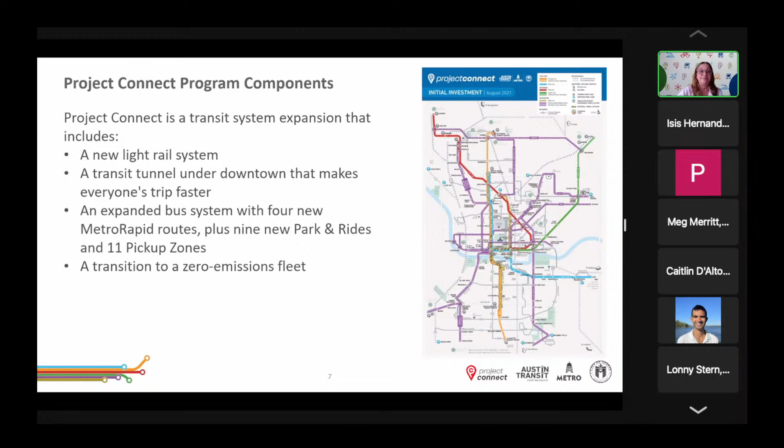Project Connect is a transit system expansion that includes a new light rail system, a transit tunnel under downtown that makes everyone's trip faster, an expanded bus system with 4 new Metro Rapid routes, plus 9 new park and rides and 11 pickup neighborhood circulator zones, and a transition to a zero emissions fleet to protect our environment. A key way to realize the efficiency of transit is through the value proposition of the Orange Line - dedicated transit ways that can move the most people in the least amount of space.

This is a rendering of a non-specific street where we could accommodate all modes of mobility. Of course, on Guadalupe we are very constrained, and therefore we are here tonight to discuss the various design solutions given those constraints.

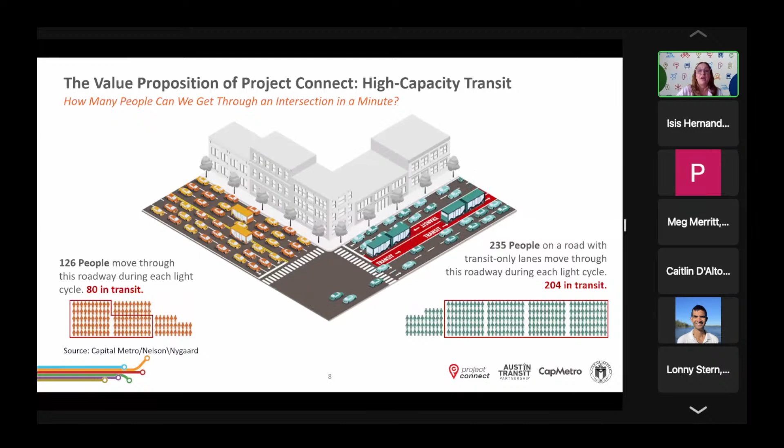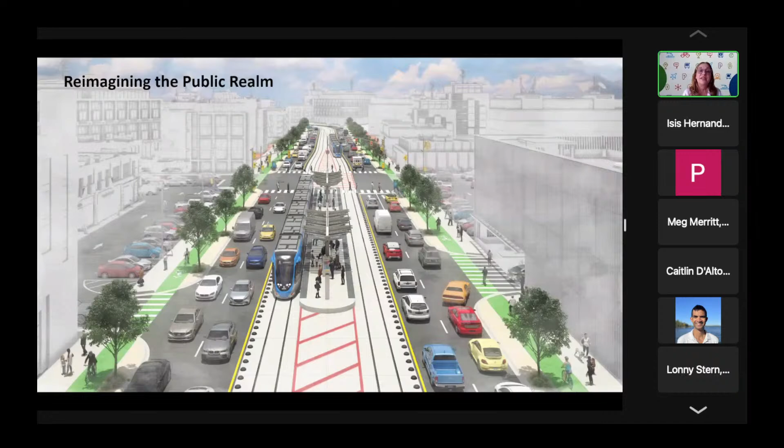We are always grounding ourselves at Project Connect with the 3 tenets of the program: equity, environment and sustainability, and innovation and technology.

In keeping with the values of the program and our community, we're putting this into practice on the drag. Our aim is to create a high quality mobility experience for all ages and all abilities. It will be evident in our careful attention to the design, not necessarily always prioritizing the speed of cars, but rather prioritizing getting more people through the corridor safely and efficiently.

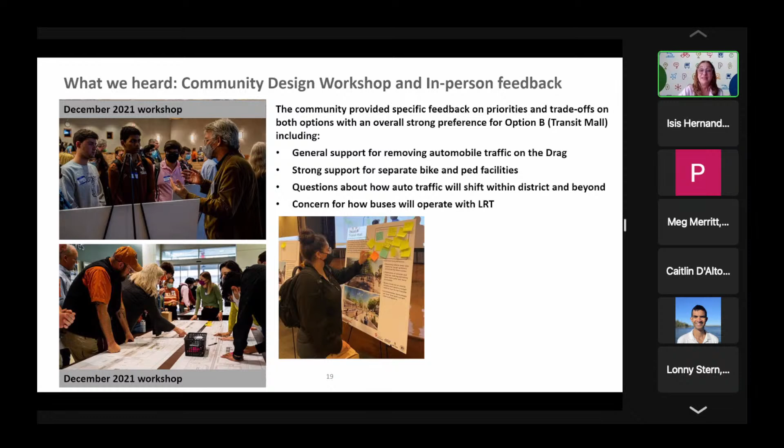Just to set the context, these are slides that we talked about when we had a meeting back in December. As we evaluate how to integrate this new, incredibly powerful transit mobility infrastructure into the Guadalupe corridor at the drag, we also recognize that the drag is one of the iconic places in our city, and it epitomizes and embodies so many of the things that make Austin Austin, and give it its character.

I mean the kind of vibrancy, the pedestrian activity, the diversity of activities, opportunities for public art, obviously the University of Texas. I think the idea of the drag in many ways right now is a little more powerful than the reality. Our goal here is how do we use this process to bring as much new life back to the drag as we can, and really enhance the whole experience of this place, so that it's not just a place that people are moving through, but a place that people want to be, and want as a destination in and of itself.

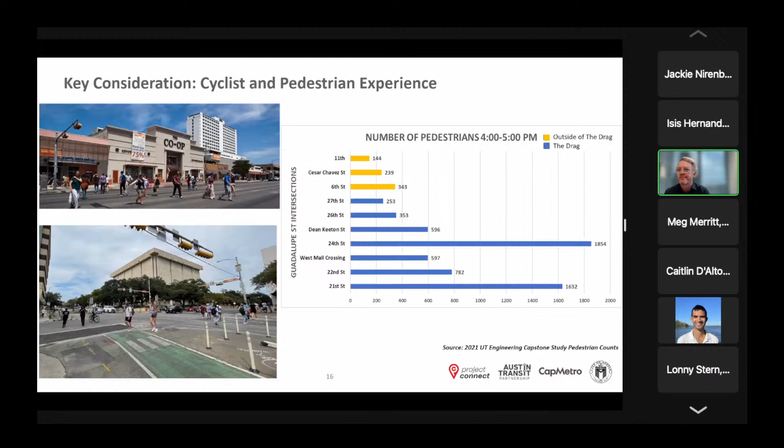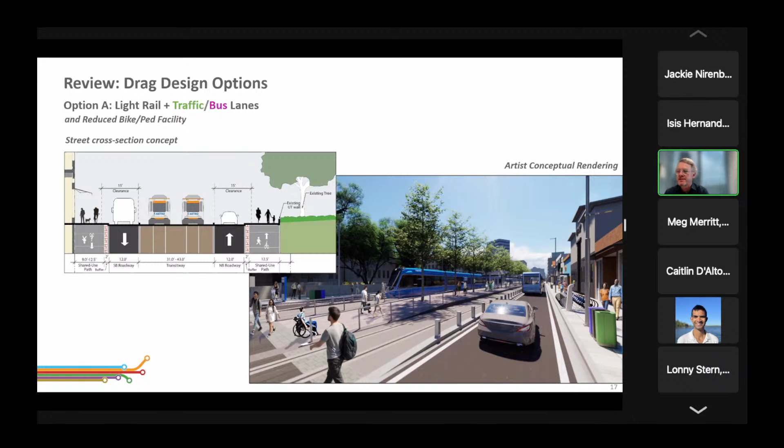As Jackie mentioned, previously we were looking at two options. Option A had one lane of general purpose traffic in addition to the light rail, and then sidewalks and shared use paths on the sides for pedestrians and bicyclists. Option B, which we called the transit mall scheme, had no general purpose traffic, and had light rail in the center that could be used for buses as well, with dedicated bike lanes and sidewalks. We'll talk about how we've tried to take the best of both of those options and move forward into the design progression.

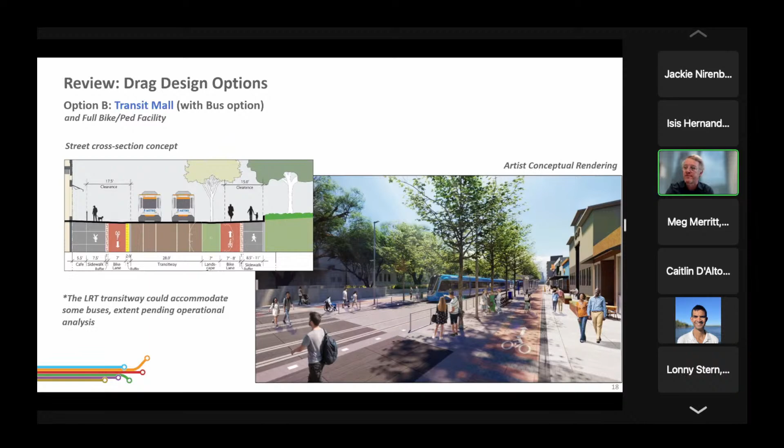We had some meetings in December, and a follow-up meeting in February, and we got some really great feedback. There's a lot of support for creating a place that really focused on pedestrians, and support for actually removing automobile traffic, making this place less of a highway and more of a place. I think there was some concern about mixing pedestrians and cyclists, given the volumes, and a desire to have separate facilities for bikes and peds.

Some legitimate questions about what if we were to pursue an option that removed automobile traffic off of the drag, what would the impacts of that be on the surrounding neighborhoods?

I think these are really important questions and ones that hopefully we'll be able to answer tonight. But obviously that's something that we heard a lot about and we want to be able to answer.

And then also a question about how buses would interact on the drag in either option, but particularly in the transit mall option, recognizing that this is one of the biggest destination areas for buses in the current system.

We know that bus service to this area is going to continue to be important. Obviously, it will change and evolve over time with the addition of the light rail into the overall transit network. But that's something we have to accommodate, it's important to accommodate into the design.

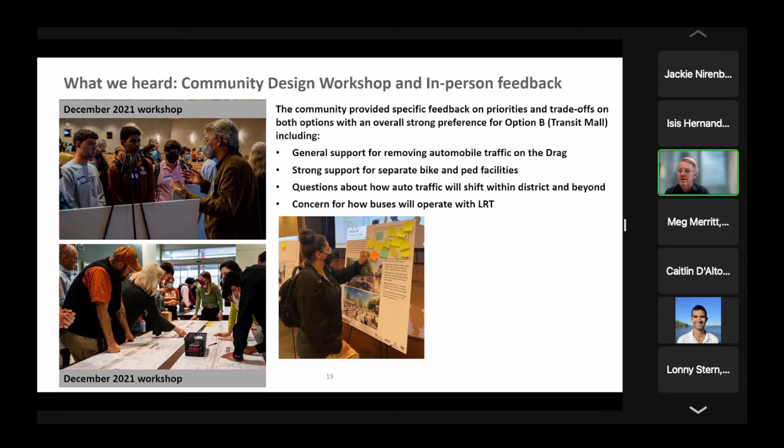One of the other things we asked about is, what are the characteristics that would make this place really succeed and thrive as a place, and so what are the amenities that would contribute to that?

There are lots of different ones that got support: outdoor cafes, good lighting. That's obviously crucial. But the one that really stands out for me is just the need for trees and shade.

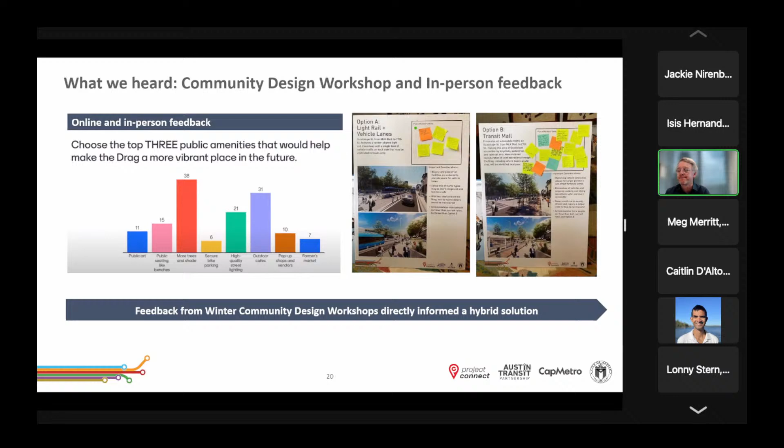And that was during a December meeting. I bet if we ask that question now, that number might even go up. I think we're all experiencing how critical that is to making places successful. So that's also something we've sought to incorporate into the design as we've moved it forward.

So what we'll be showing tonight is what we're calling an enhanced transit mall. We're calling it option C, and it is kind of a hybrid of options A and B that we reviewed previously.

The proposal is to be focused on transit, pedestrians, and cyclists. So removing general purpose traffic from the drag between 22nd and 29th Streets. Really a transformative opportunity for this place.

And we've tried to take the elements of the previous options previously reviewed and kind of refine them and enhance them to make this work as well as we can.

So we've kind of shifted the alignment of the light rail a little bit to the east so we can get a wider sidewalk on the west, and also a continuous row of street trees.

So we've got a kind of a great street style sidewalk on the west next to the retail on the drag. And then we have separated bicycle facilities, and we have what we're calling an option lane, and there are different scenarios for how that could be used.

There's an option where that option lane could be used for bicycles only. That's option scenario C2. And then there's an option where it's shared with buses.

I think this is something that we can study over time to really maximize and optimize the operation of that lane. So lots of flexibility built into this new configuration that kind of tries to take the best of both of the previous options previously discussed.

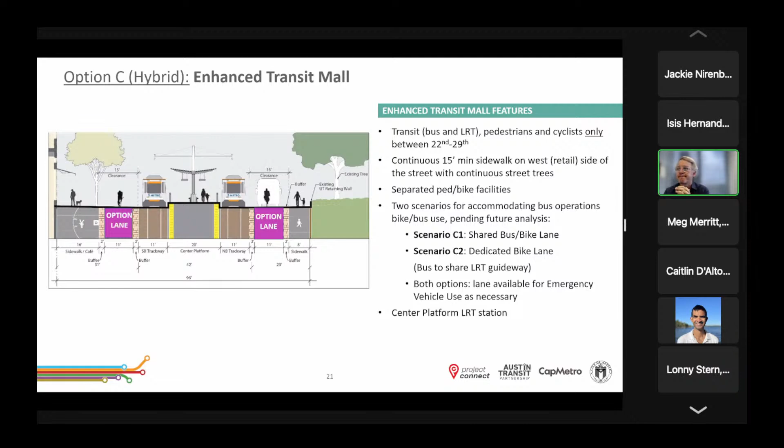So here you can see those two scenarios side by side, and the color configuration is something that you'll see repeatedly throughout the presentation. So on the left, scenario C1, and the physical configuration is the same.

It's just a question of how that option lane gets utilized, and therefore how the light rail guideway gets utilized in either scenario. So in scenario C1, marked by that sort of pinkish color, that option lane is a shared bus bikeway.

We'll talk a little bit about precedents for that. And then option C2, that's the green, that would be a dedicated bike lane. And in that scenario, buses would share the LRT guideway for this section of the orange line.

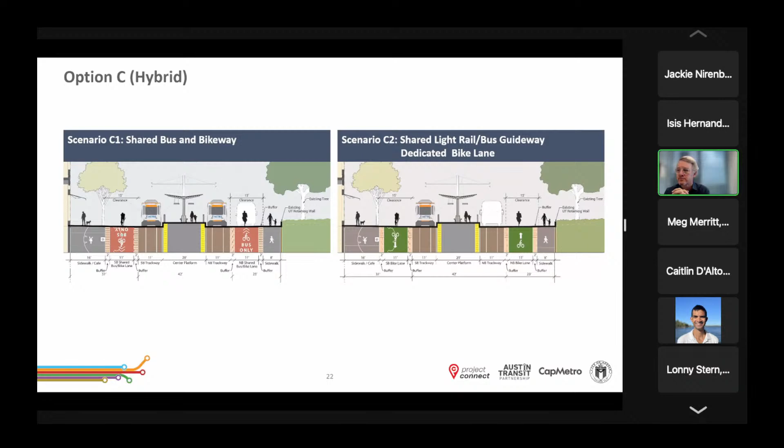So now we'll go into, I'm going to pass it to Meg, who's going to talk about some of the analysis we've done regarding traffic and just the mobility through the corridor in general.

Thanks, Peter. During this section, we will be reviewing some of the evaluation factors that the project team used to better understand the trade-offs of the various design options that Peter walked us through, both qualitative and quantitative. We will go through the analysis in 4 parts.

First, we'll discuss the key performance indicator that Jackie introduced earlier, that is person throughput. Next, we'll take a look at how the drag performs today and how traffic may be redistributed throughout the district in the future. Then we'll take a look at data from the traffic study and proposed mitigations. And finally, we'll discuss the future of the drag as a place for the community.

One item to note, since option A proposes a lane of auto traffic and options B and C propose no auto traffic, for purposes of the evaluation, B and C were effectively modeled together. So throughout this section, when we compare option A, we compare it to a combo of B and C together.

Also, when we use the term no build, we are using shorthand to describe a scenario in 2045 that would pan out if we did nothing. The good news is that we aren't doing nothing. We are building the orange line, but this is like a data control, you can think of it that way. It helps us understand appropriate interventions when we're comparing options. And as a reminder, we will break at the end of the mobility network section for live Q&A.

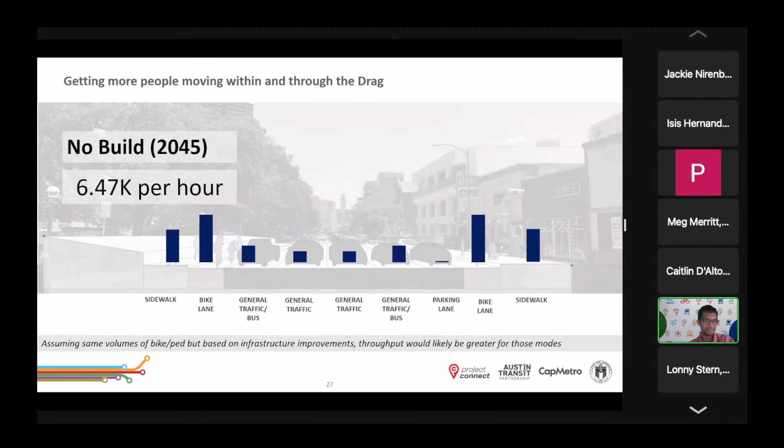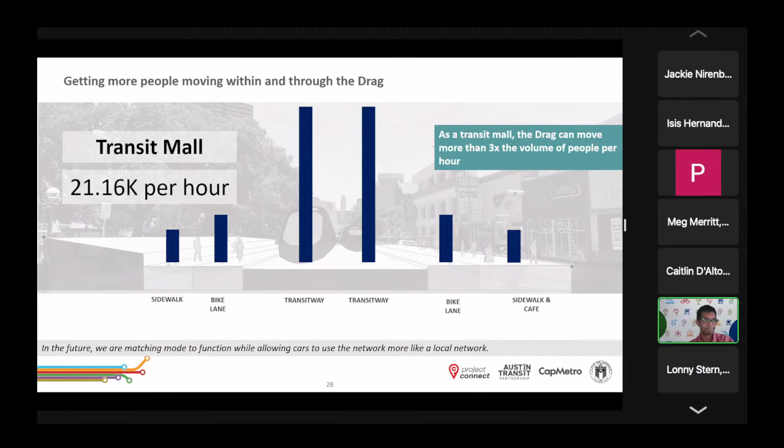Here's a cross section of the area near the West Campus Mall, showing no build traffic currently. And next slide, this is the throughput with the transit mall. As we saw, the highest efficiency is option B and C. And back to you, Meg.

Great, thanks Vikram. Okay, let's talk about the second part of the findings. The point here, and the takeaway in this second component, is that a significant amount of current drag auto traffic is through traffic. That is, it does not use the drag or the district as a destination, but rather it's commuter traffic.

And the finding here is that commuter traffic can use other major roadways. This animation shows some of the general patterns observed during the traffic study. In this first frame, we see a 2045 no build scenario where a lot of the through auto traffic depends on Guadalupe. But next is a scenario modeled in the build option BC, where the mode split is rebalanced and auto traffic is better matched to the road network around it, meaning the through traffic uses major roadways while local traffic uses district streets.

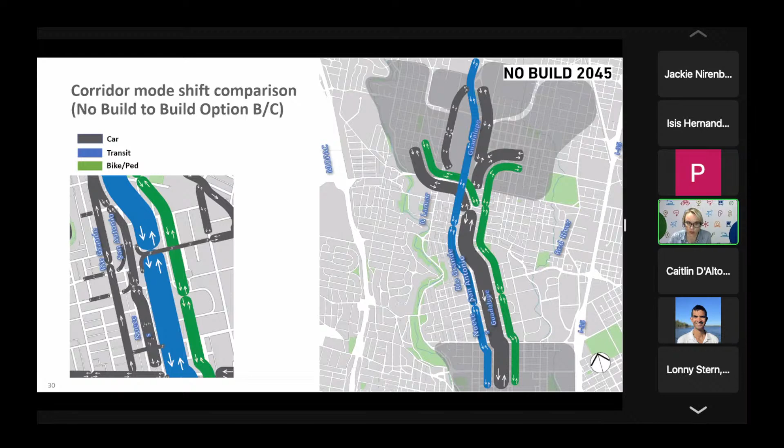Caitlin is going to walk us through a major finding from the traffic study along with our partners at the city, and that is that any resulting changes to local traffic can be mitigated through improvements to the local street network. Taking traffic off the drag is comparable for drivers to keeping one lane on the drag.

I'll pass it now to Caitlin, who can walk us through some of the early findings from the city. Great, thanks. As Meg mentioned, I'll be providing a brief overview of the near-term improvements that the city has planned in the West Campus area.

I'm sure most of us in this meeting know that West Campus is experiencing growth and increased density at a rate that our current roads aren't designed for. And while there's no perfect solution to address this, we need to do something.

So one of the improvements that the city will be making is converting Nueces Street between 24th and Guadalupe to accommodate two-way traffic. This conversion was planned before the vote for Project Connect and will help us address safety and mobility concerns in the area.

Additionally, as Project Connect begins construction in the future, the need for alternate ways for traffic to navigate through West Campus will increase. And this change to Nueces Street will help address that too.

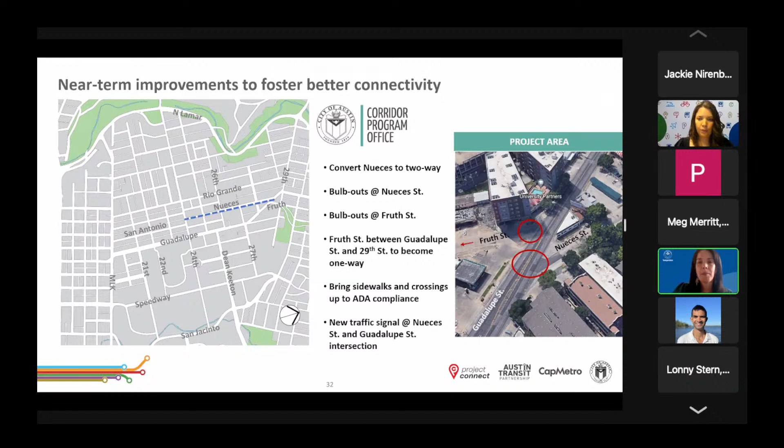Some of those improvements that I just mentioned will begin construction over the next few weeks. Our hope is to implement the two-way conversion on Nueces Street over the winter break, but timing for that change may vary. So with that, I'll pass the mic over to Isis to discuss some of the longer term improvements planned as part of Project Connect.

Thank you, Caitlin. Our study area considered a section that included to the south 15th Street, to the north the Triangle, to the west Lamar, and to the east Guadalupe Street. Now that we have the area clear, let's talk about some of the early findings that the study had in the traffic network.

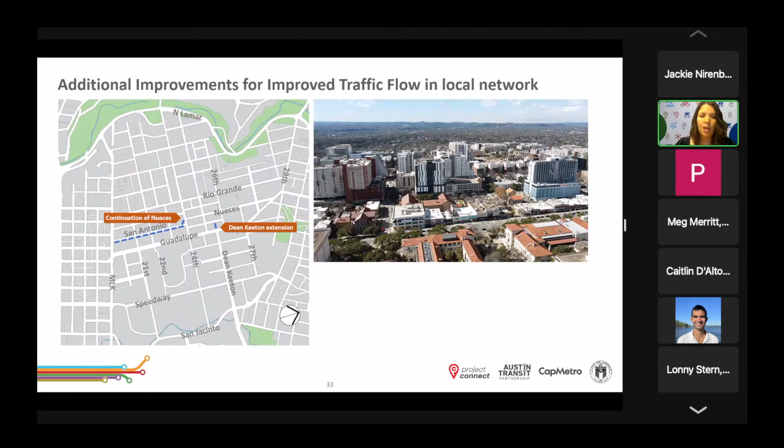We know—I think you just need the slides advanced. There you go. You might want to just direct the slides to advance so that they're timed with your comments. Thanks, sure. So this is, I'm going to go through slide 33, in case that helps.

We know that the more we connect the grid, the better it is. Because of that, we are assuming certain modifications to the network as the start of the analysis. Dean Keeton is going to be extended all the way to San Antonio, and the intersection at San Antonio is going to be realigned to have a continuous road all the way from MLK to 29th Street.

Now that we have that covered, this slide is talking about some of our analysis. The team analyzed 64 intersections in the study area in order to compare the no-build option to option B. Option B is also option C, as Meg explained. The analysis also compared option A against option B or C. Since auto traffic in option B is the same as option C, they're modeled together.

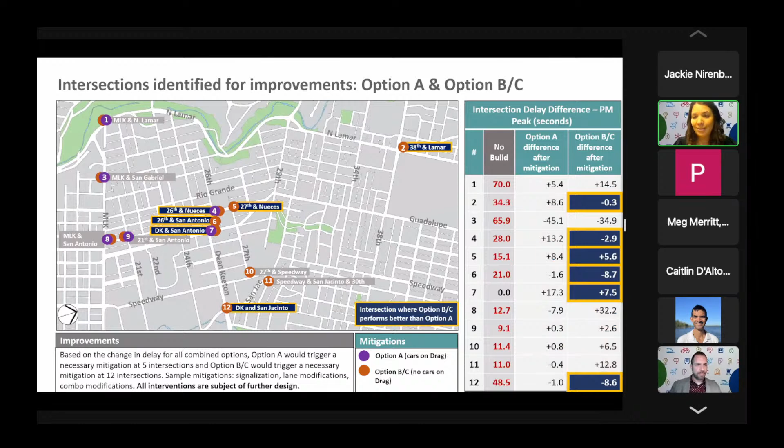So Lonny is going to try to see what comes next. Well, thanks Isis. In a situation like this, where you don't necessarily see a vast difference between option A and option B/C, you have to remind yourself that we've just grounded this part of the discussion on delay for car users. The truth is, the road is used by a lot of people.

There are people on their feet, people on their bikes, people in buses, eventually in trains, and also people on scooters, as we all know. And when you look at the ancillary benefits for all users on the street, the story really changes.

Next slide, please. So the goal, one that was highlighted in previous discussions, was looking at the future of the drag as a place for the community, rather than just a place for cars and traffic. Next slide.

Now, I know when I first arrived here in the 90s, I really thought of the drag as a destination, a premier shopping district. The longer I've lived here, the more I think about tiny sidewalks, no tree cover, and very hot conditions—having seen people weave in and out of traffic on their bikes between delivery vehicles and cars.

That are parking, now buses as well. And then gridlock—it's a place you want to avoid during rush hour. So we're trying to balance those needs and improve the quality of life in this part of town. Next slide.

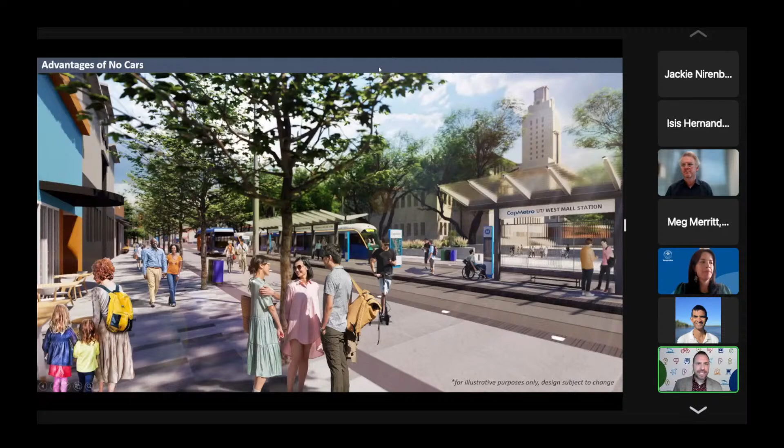I wanted to start with some of the questions out there, and let's go straight to the heart of the matter, because I've seen so many comments from folks about Dirty Martins. Peter, I'm sure everybody on the team has thought about it. I think one of the best ways this was said was: I'm a believer in the importance of public transportation—Evan, I think that was you—that said, I also believe cultural preservation needs to be included in any conversation concerning city planning. So, Peter, what are your thoughts about the impacts this project could have on buildings that mean a lot to people in the community, and what happens to those businesses should there be an impact?

Yeah, I mean, Evan, you said it exactly right. We couldn't agree more, and this is part of why we have these meetings and this dialogue, so we can make sure we're hearing from the community about the historic and cultural resources that mean the most to them, and do whatever we can, wherever we can, to make sure we're at least limiting or not impacting those important places and cultural resources.

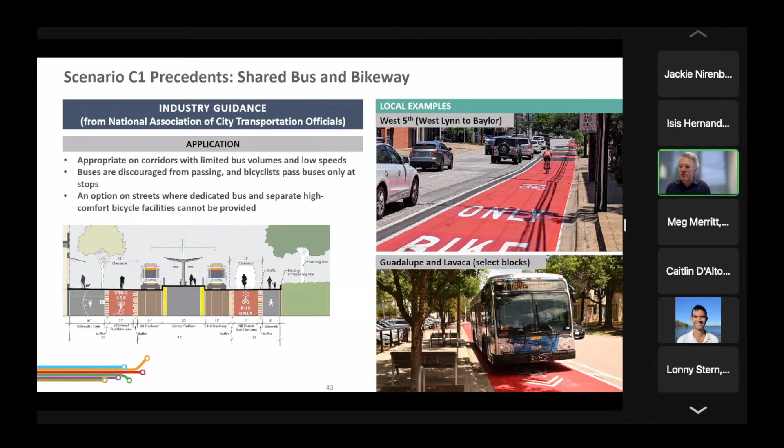In this option, scenario C1, with the shared lane, we've got both local precedents and the NACTO standards that Caitlin cited earlier to help inform how we can make this work. This works based on making sure bus operations are infrequent enough that bikes have the room and ability to move as they need to.

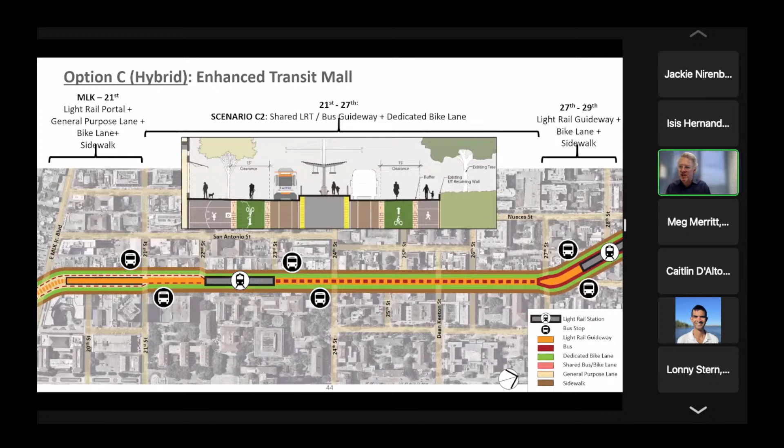Scenario C2 is where the buses would share the light rail guideway, and the green represents a dedicated bike and micromobility lane, separate from where the buses travel. When we get to 27th Street, between 27th and 29th, in both scenarios there's a dedicated bus lane, so at that point everybody's got their own lane. But between 21st and 27th Street, there is sharing in both scenarios.

Looking at precedents for shared bus LRT, there are some national examples where this is done. Portland, throughout their transit mall downtown, the buses and light rail share a lane. And in Minneapolis at the University of Minnesota, the Washington Avenue project, they recently installed a corridor that's free of general purpose vehicular traffic, with a shared bus LRT lane. So again, there are places where this has been done. We just have to study how it would work here based on the volumes, speed, and frequency of light rail vehicles and bus routes. So it's something that has started, but requires more study.

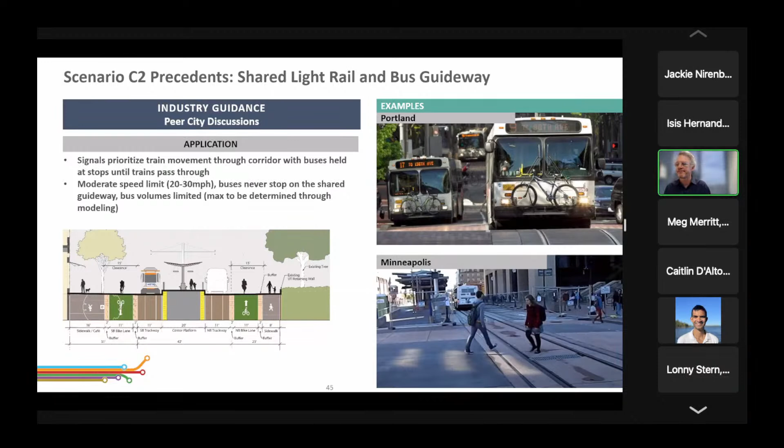Okay, so I'm going to walk you through from south to north, again, how this all works out in some detail. We are working with a pretty constrained space, trying to figure out how to squeeze in all these different modes that are really busy in this area. So we're at MLK to 21st Street. This is where the orange line would basically be emerging from the downtown tunnel into the at-grade running section. You can see the trains would come underneath MLK and then rise up, and by the time you get to 21st, the trains are at grade. In this one block, we've got one lane in each direction for general purpose traffic.

We also have dedicated bike lanes for most of it. There's an interesting little twist on the northbound side, the east side of the street. There's a bike lane coming up Lavaca, and looking at how that lane could transition to Guadalupe, we think there's a route that maybe goes behind Rowling Hall and connects on 20th Street, then connects to Guadalupe. Also, we've got some driveways we have to accommodate for the Dobie, etc., so we figured out how to squeeze that in. And then there was a bus stop, which you can see on the east side of the street, the west side of the street, just south of 21st Street.

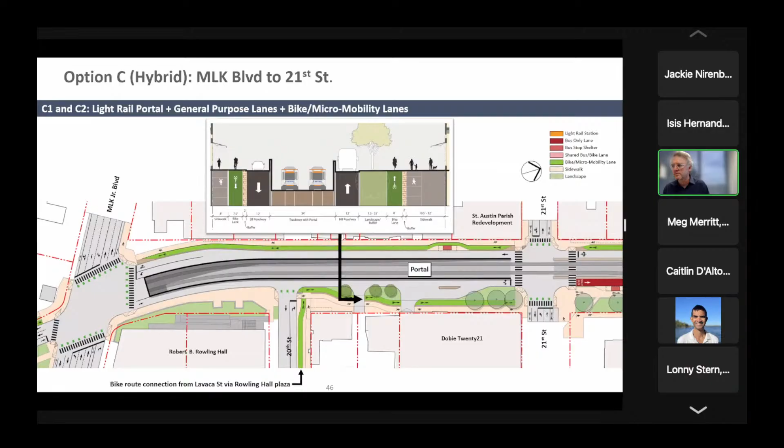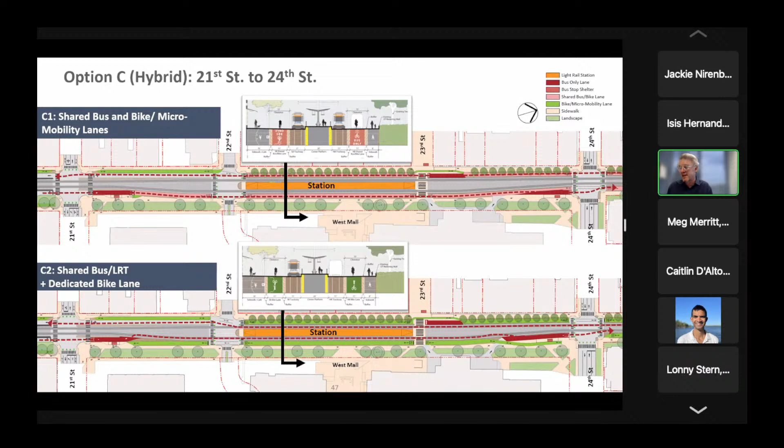Some people asked in the chat why it can be different once we get past the station. Obviously the station needs more width for the light rail. One of the things you can see is that once we get north of 24th Street, the roadway actually shrinks down by about 16 feet or so. We're taking advantage of that, one of the reasons we locate the station in the wide section is because that's where we've got the most room. When we get north of 24th Street, things get a little tighter.

Gotten some questions about servicing to the buildings on the west side of the street. If we take out general purpose traffic, there is a continuous alley for much of this. And then I think when you get to the north, there are some places where the alley ends. So I think we figured out how we can manage access from the cross streets in that location. I think we've got that solved, but maybe we have to go back into that in more detail.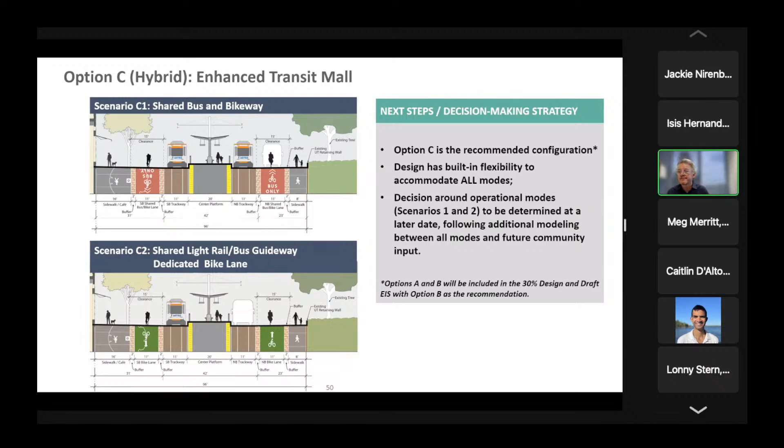Next. So now we got some updated renderings to show what that would look and feel like. We'll just walk through those quickly and you get a sense of how it compares to the existing.

One thing to note is that the light rail platforms, remember, they're not like the commuter rail platforms. They're only about 14 inches above the track. So this should be a fairly seamless, visually seamless environment.

And so we have the center platform with canopies. Again, this is kind of a placeholder design. Design of those will come later. And you can see the light rail train, the northbound light rail train, on the east side of the platform. Go to the next.

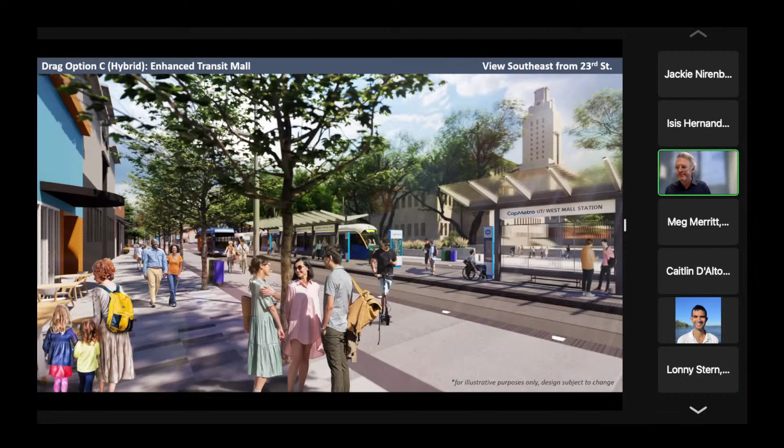So you get a sense of how we can start to make the whole space for all these different modes feel a little bit more generous and more spacious. And really, I think the station also becomes a kind of part of the gateway to the campus, which we think is a real opportunity. Let's go to the next.

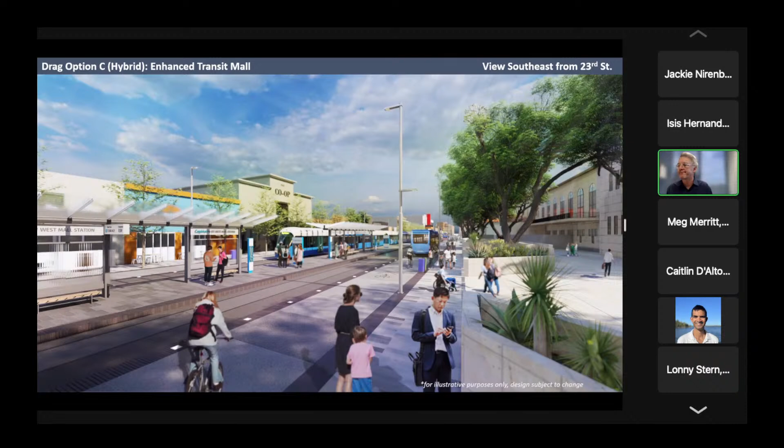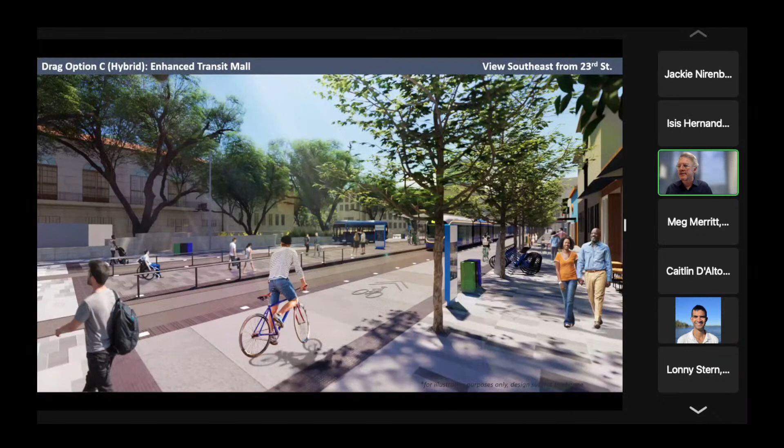You can see how we've got the sidewalk zone next to the retail, really generous. I think that tree and furniture zone has opportunities for various types of street furniture, whether signage, trash cans, or bike parking, etc. We've got the option lane, then the light rail guideway, and then the light rail platform.

Now you can see there are some indicators about how these different lanes would be separated, with different paving patterns, and you can see those little white squares. Those represent lights in the pavement that could announce the arrival of the train when it comes.

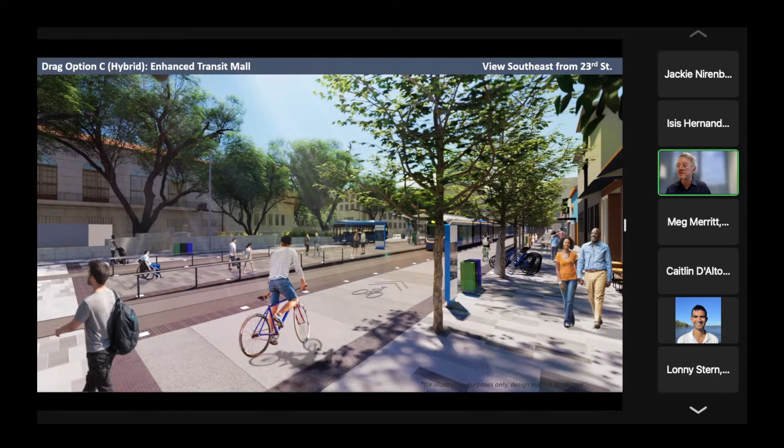I think there are lots of details to be refined here over time that will really make this work optimally and also kind of beautifully. So I think we've got lots of future development to come in terms of the design going forward. I think that's it. Next. Yeah, so that's more of how this new configuration, or updated configuration, works, and I look forward to taking more questions.

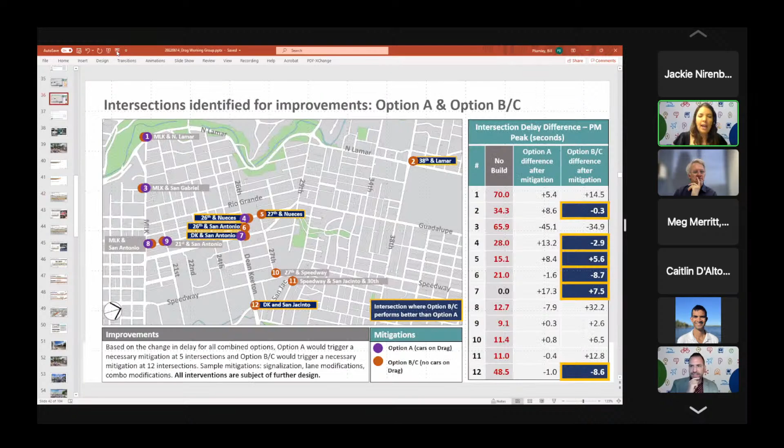Yes, and I think I want to answer the second part of the question, because I think that most of this question was asking about the intersection of MLK and San Antonio, which is where there's a Chick-fil-A and all of those businesses and the hotel. There are visual aids in the presentation tonight that can show that, or do you have anything that you can put up? Yes, if you go to slide 36, I think that will give us a little bit more answers. In that table, we can see that we're proposing a mitigation on MLK and San Antonio. That mitigation at this particular intersection, mitigations throughout, it's either signalization or lane reconfiguration that works best for the traffic that is being rerouted. This is one of those intersections where we're proposing mitigation to help with the many users that will be here for the hotel and for the businesses, and then on MLK traveling east-west. So that's a mitigation that we're proposing at that particular location.

Yeah, but Diane, I think you've identified some of the factors. If you look at the numbers, that intersection at MLK and San Antonio is one of the ones that's the most challenging. So yeah, I think you've correctly identified that as one of the tough spots in the network, and so we're going to have to continue to keep looking at that.

I see Lee came on. Lee, do you want to talk about that at all? Yeah, hi, I'm Lee Austin, the Central Traffic Engineer for the City of Austin.

One thing I don't think we've quite covered is that this two-way conversion of Nueces to San Antonio will not replace Guadalupe as it is today, and that's not the intended purpose. It won't be all that convenient to use Guadalupe or Nueces to San Antonio as a through route. That traffic we expect to reroute to other arterials like Lamar, 35, or Mopac. We know there's not tons of capacity there, but they'll be much more convenient through routes.

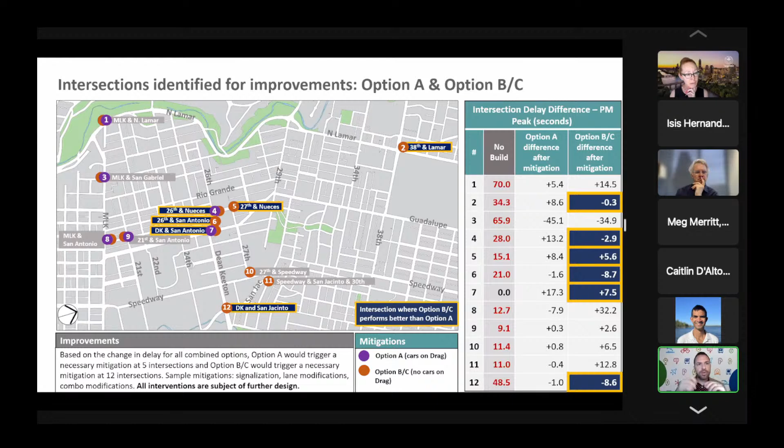While we have you here, Lee, and Isis may want to weigh in as well, but there were some questions about how emergency vehicles will access this area, and how deliveries will be made. I thought you might want to talk about how the plan has responded to that need versus maybe the first version.

We still have to work with all the local businesses, because it's hugely important that we supply our businesses and keep them operational. We have the alleyway, which right now isn't super convenient for large trucks because it's difficult to get through there. That's an alternative, but I know the alleyway is also used by the schools, so that's an important consideration. We have San Antonio and Nueces as delivery areas as well, particularly San Antonio north of 24th, which would be a good area for a lot of deliveries. We're definitely going to have to work through this with the businesses, because getting freight deliveries is a hugely important part of keeping them operational.

And to add to that, we are working with the Austin Fire Department as well, to make sure that even with these changes, emergency vehicles will still have access to where they need to go.

Thanks for that, Isis. Let's try Lyndon one more time. After that, we're just going to chalk it up to technology. So Lyndon, if you unmute, you could be live. All right, Lyndon, I'm sorry it's not going to work out tonight, but I know how to reach you, and you've certainly appeared at several of these meetings. So I'm going to slide down to Carl and allow you to talk. If you unmute yourself, you can be live on the air.

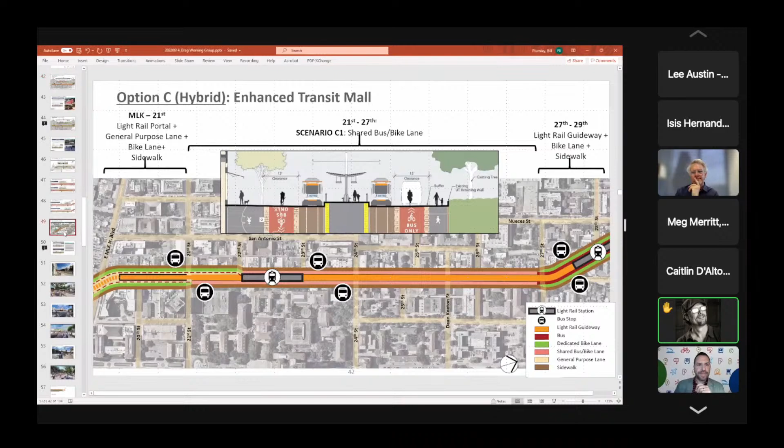Hi, not to beat a dead horse, but I was looking at the plan that Peter presented in that segment on Guadalupe where Dirty Martin's is, and to me it looks like the only thing taking over that property is the trees. Is that the case? Is there any other option? I would hate for Dirty's to be torn down just so you can plant trees there. I would 100% agree with that.

So, Isis, you can help me out here. The triangular site here, that's where the Whataburger is, right? So Dirty Martin's is actually north of that, right? And the entire guideway itself for the light rail is directly impacting that. So it's not just the trees.

I mean, even if we necked down and shared everything between buses and bikes - you can't share with peds, obviously, or trees - even if we necked all of that down to the absolute minimum, I think we still are impacting Dirty Martin's, unfortunately. So this is the most constrained that the right-of-way is. This is about 50 feet at the narrowest, and just the track by itself, the guideway by itself, needs 28 feet. So if you can imagine, we played with this for a long time. We were trying to be as creative as possible to reduce those right-of-way impacts, and there was no way we could avoid impacts to the west if the orange line was going to pass through here.

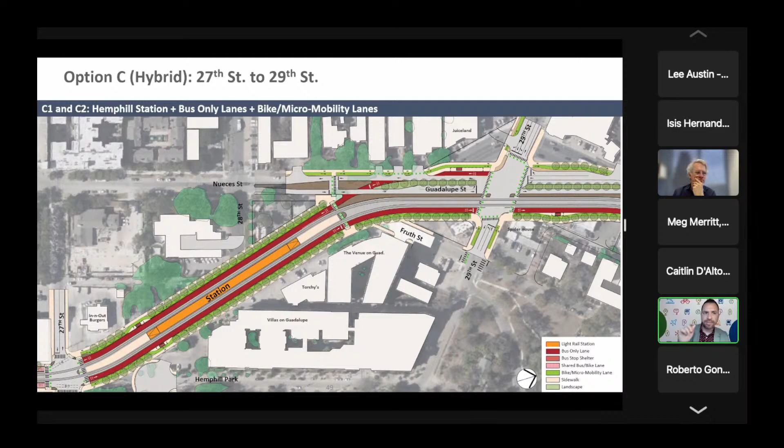Thanks for bringing this up. I just thought we could have one more discussion there from Carlos, having seen the second half. But again, in the Q&A document, you can see there's a link to a previous conversation we hosted with the North Guadalupe Working Group. We went into a lot of detail about how that particular intersection at 29th and Guadalupe would be impacted by the plan, and I'd recommend you take a look at that as well for more context.